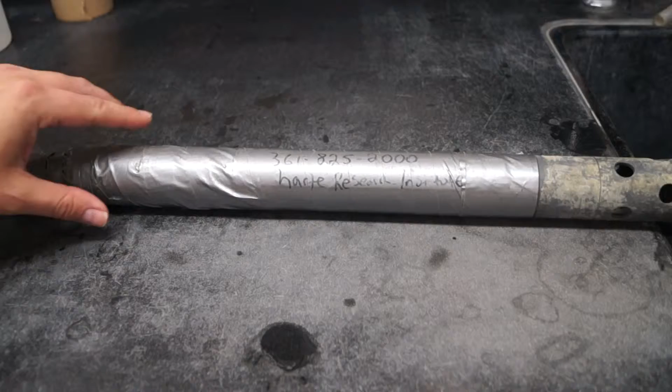In this training video, we will be post-calibrating a YSI Sonde instrument that was deployed in the field. In order to do this, I retrieved the deployment form that went to the field and also the calibration sheet that was left in the book.

So the first thing you're going to do when you get this unit from the field is clean the outside of it, but not the sensors itself. Do not clean the insides of the sensors because we're going to be doing the post-cal procedure. This unit was scrubbed, at least it's somewhat clean on the outside, but it has the duct tape on it. The first thing we need to do is take this duct tape off so that we can hook it up to the computer and also clean the outside very well to get it ready.

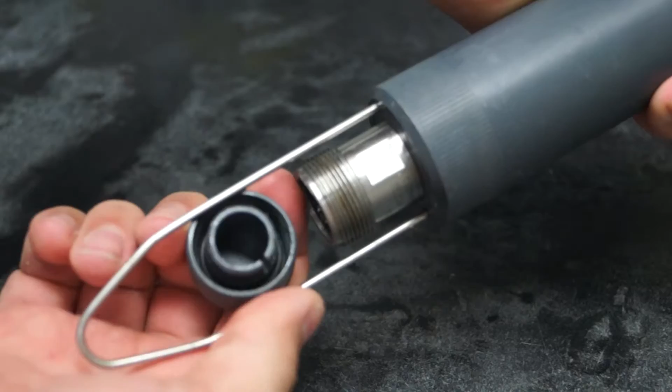I've got the outside of the unit clean now and the duct tape is off, and this connector looks pretty good. I did not clean the top head or inside the sensors so that we can post-cal. I'm going to remove the cap on the end and give it a visual inspection to make sure there was really no water leakage or anything in it. Looks decently okay. Alright, I'll put a towel in there slightly and try not to touch any of those.

Alright, now I'm going to hook it up to the computer. This only goes one way and it's in. Alright, so now let's go to the computer. We start the EcoWatch program. Inside EcoWatch, we're going to go to COM terminal, and then we are going to connect to COM 4. Now we should see the little hashtag that the sonde is operational. If it's not operational, that means that the batteries had run out and we would have to put new batteries in order to get the data off that is logged.

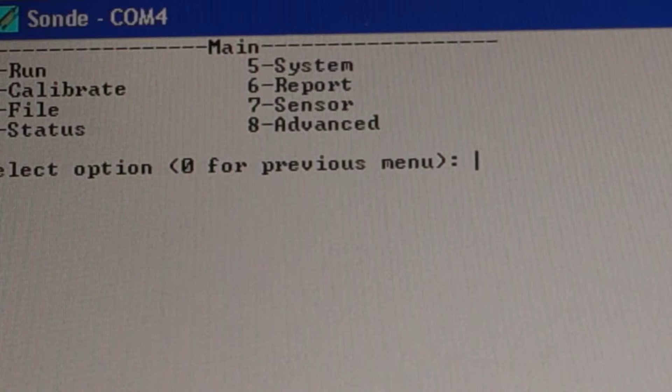So we type menu. Okay. What we're going to do now is stop the logging, because it's been logging this whole time in the field. What we want to do before we post-cal is stop logging and get the data off. So I'm going to go to run unattended sample and see it's been logging. So we're going to say B to stop logging. Stop logging, yes. Okay. And now we're going to go back, and according to the deployment sheet, the file is W2 15 12 20 on this particular unit.

So we're going to go File, and we want to upload this to the computer, and we're going to pick the file we want to upload. So W2 15 12 20, that looks like this bottom right here. So S, and then we're going to say proceed and pick PC 6000. Now it's actually uploading this whole file to the computer, which will take a few minutes to do.

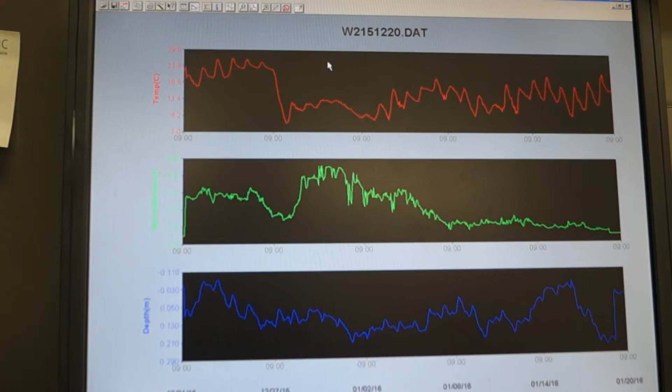So the file finished uploading, and I want to look at it. So I'm going to go to File, Open, and then pick the file. It's going to be in this directory structure right here. This is on this little computer that is downstairs in the lab. So we're going to pick the W2 15 12 20, this one, and I say OK. This is going to open up a bigger window. Let me scale back a little bit here so we can see the whole file. This is just on the computer. I can't take a screenshot of the computer, so that's a little bit of a problem.

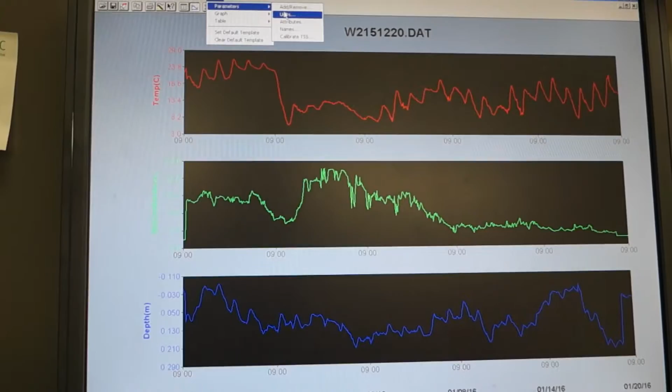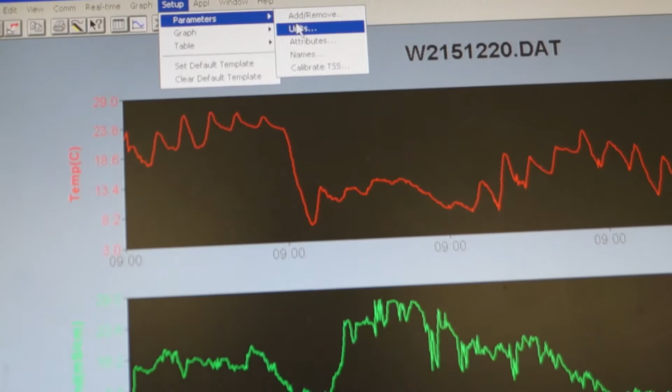Alright, so this has got temperature, specific conductivity, and depth. We're missing the salinity from here, so what I need to do is go add salinity. This unit didn't have any other parameters I needed to add. If we had, say, a unit that needed DO, you would have to add that as well if it's not on the file. So let me zoom into what I'm doing here. We go to Setup, Parameters, Add, Remove, and that lets us pick through a list of parameters that are on the sonde that we want to include in the file.

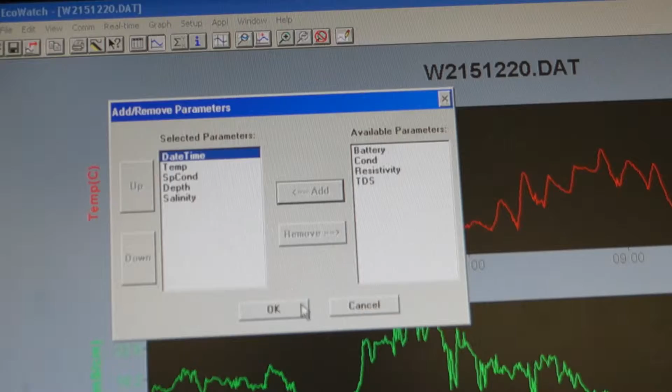So you could include the battery, conductivity, these things, but I'm not interested in that. All I really want added is salinity. So that way these are all going to be in the file, and when I say OK, this now adds it to this screen. So if I pull back, you see the whole screen right here.

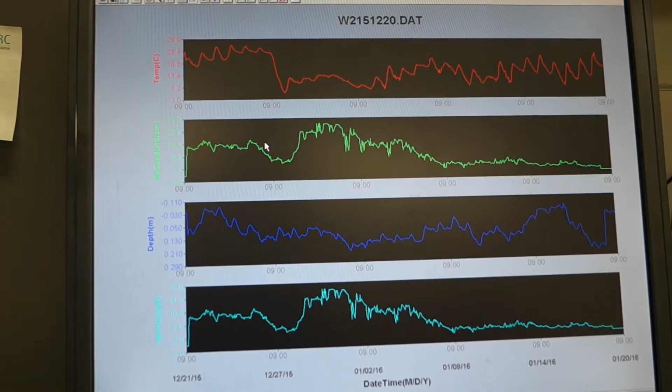Now what I'm going to do is save a screenshot of this on this computer, and the way that we can do that is on a keyboard of any PC computer, you push Shift and then Print Screen. So if I hold Shift and Print Screen, that's it. It took a screenshot. Now nothing actually happened on the screen of the computer.

Nothing actually changed, but what you can do is if you go to Start, Run, and MS Paint's already there because I did it before. I open Microsoft Paint, and then what you could do is paste, so Control V. Now I just pasted the screenshot. Now I want to save that.

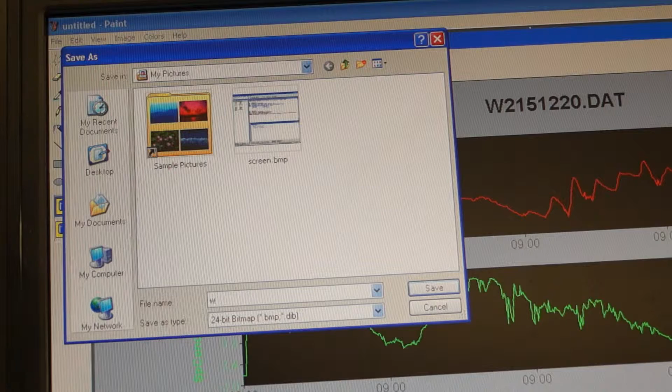File, Save As, and I'm going to save it with the same name convention that we're using. So it's W2 15 12 20, and just save it as a bitmap, but I'm going to put it where the other data is located, so it's in C EcoWin data, and I'm going to click Save. Alright, now we saved a screenshot of this data, so I can go ahead and close Microsoft Paint.

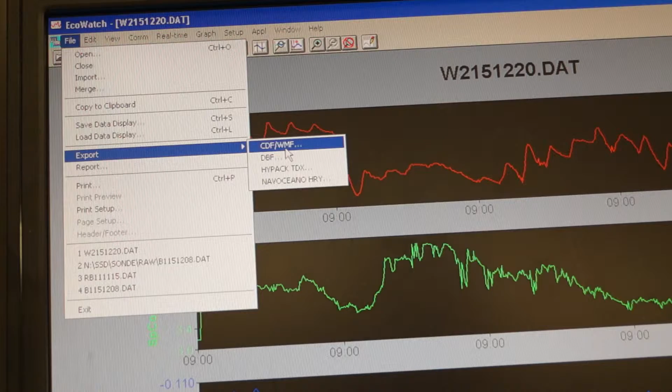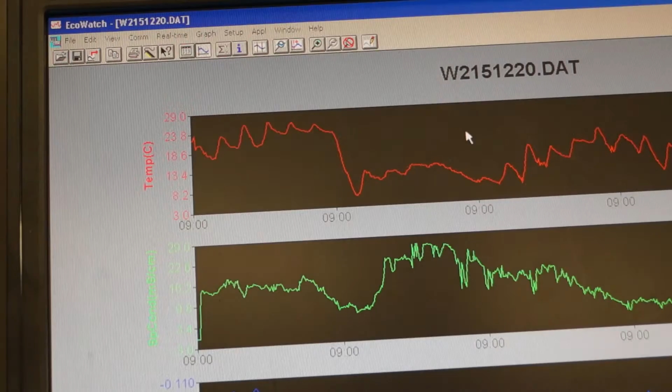Now I'm back in EcoWatch, and in EcoWatch I'm going to export this file. File, Export CDF. It's going to come up with a window to export to CDF in the same folder structure. All right, and then I'm just going to say export, and that's it. So now I can just close this file using the little X, and we've closed that. One last thing that we need to do is move the file off of this computer

onto our network share. So I'm going to go to My Computer, and I'm going to navigate to the EcoWin folder, C EcoWin data, and if you just sort by date modified, you should see these things right at the top. These are the files that we're interested in. So I'm going to get another file window, and this time I'm going to go to our share on N, and navigate to SSD Sonde, and inside that, raw. This is our copy of these files.

So if I move this out of the way, now I'm just going to take these files that we just created, and copy them onto the other folder. And that's it. So now they're there. So we made a copy. So in the next video, when we go to actually trim our data and look at things, we can do that at our office. While we're in the EcoWatch program and the Sonde is still hooked up, what we're going to do now is postcal the machine.

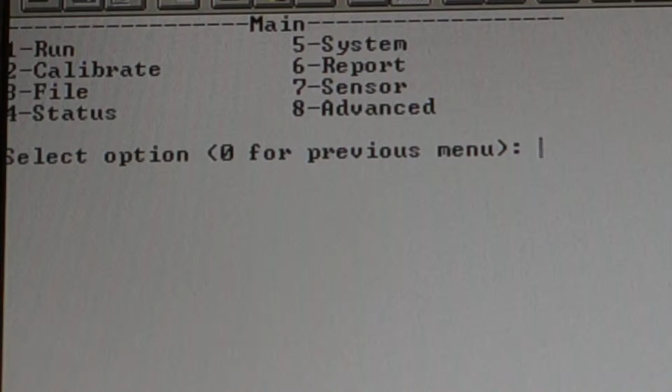Okay, so you've got to kind of warm it up because it was turned off. Go 0, exit menu, yes. Okay, and what we're going to do this time, instead of actually calibrating, because we don't want to change the sensors, is just see what the values are on the unit when we do a sample. So right now I'm just going to go to discrete sample and just start sampling, and it's just going to see what's on there right now.

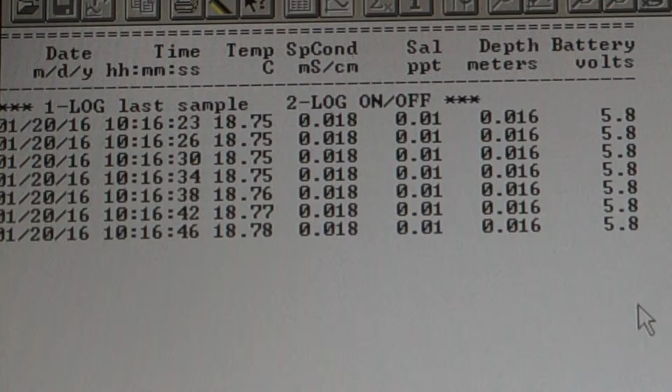Okay, so right now there are some things I need to write down on our calibration sheet, and one of them is the battery voltage of the unit. So right now there's 5.8 volts left in the unit, and I write down today's date. I'm also going to write down the depth, because we are not in any water, it's in the air, so depth should be 0. It's actually pretty close to what it should be, so it's actually pretty good.

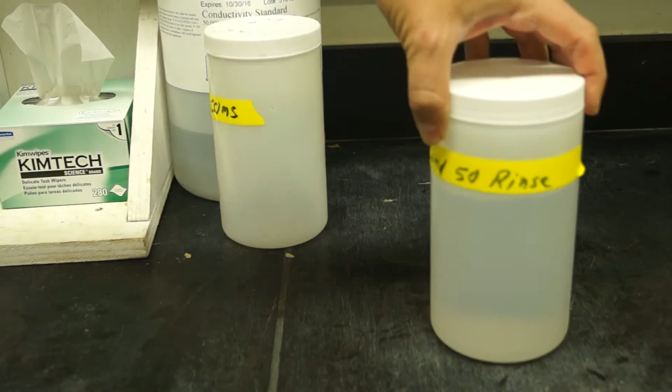So on the post calibration sheet, I'm going to have a spot for depth, and the value of the standard is 0. Initial reading is 0.016. I say it passes postcal, because it's within 10% of 0. Alright, so now I'm going to set up some conductivity standards. So just like before, we're going to have a rinse and then the regular standard. I need to fill this up.

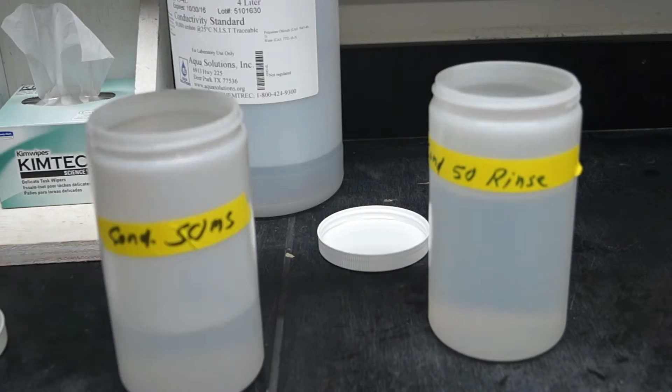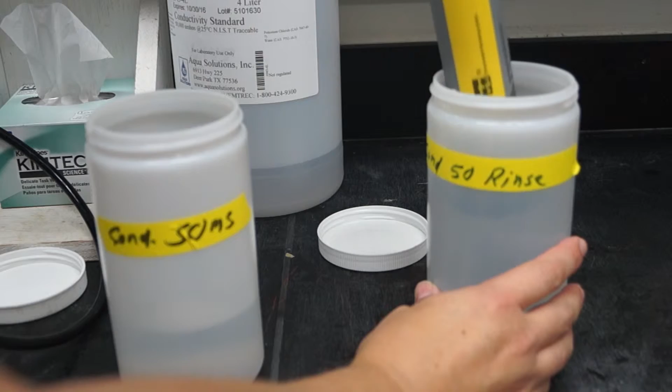Alright, there we go. And what I'm going to do is I'm going to rinse the sensor off. Again, this is where this is not cleaned. So what we're trying to do is figure out how far off was the sensor from the actual data. So I've rinsed it decently. Okay, and now let me put it in the standard. Alright, I make sure it's covered.

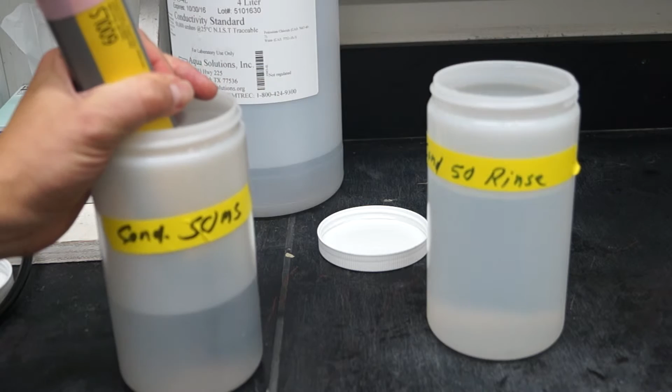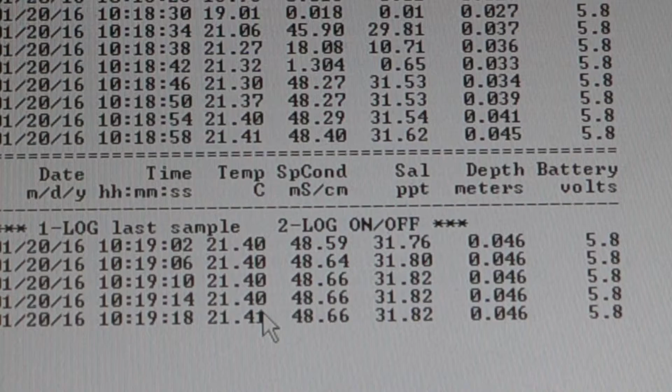So I'm going to go back to the computer and I'm going to see what it reads on the computer. So according to the computer, it is reading at 48.66. So our value of the standard is 50. The initial reading is 48.66 or 67. Looks like it's going up a little bit. And that should be able to pass post-cal because it's within 10% of the standard of 50.

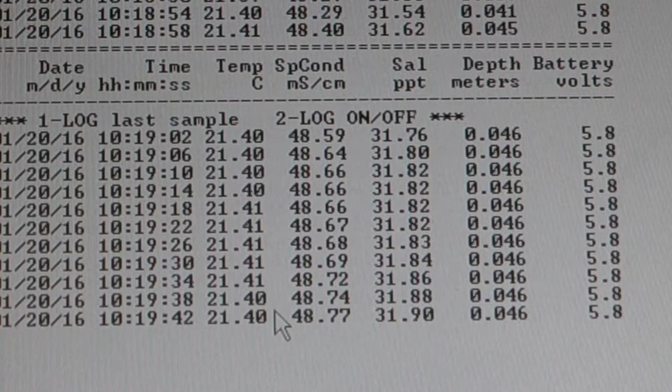I'm going to write down the temperature of the standard, 21.4, for my own records. Alright, so it looks like this unit passes post-cal, which is very good. So now I need to clean up. I'm going to stop logging on the computer. And I'm going to unhook. Okay, and then I can put this cap back on.

Alright, then I'm going to dump our rinse. This is especially important since we're post-caling and this is a little bit dirty. Pour the standard into the rinse. Screw this back on. Alright. Now I can further clean this instrument and get it ready to put back up on the shelf.

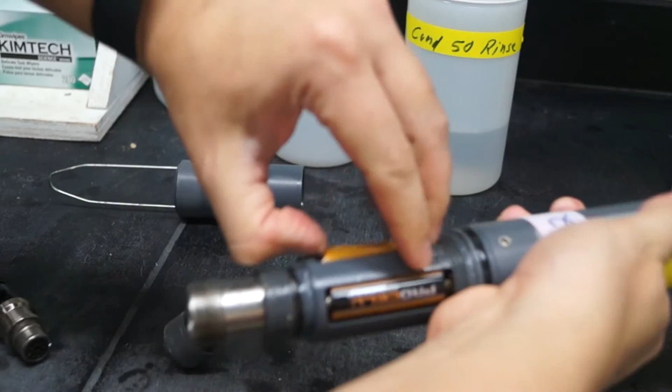I'm going to remove the battery cover, which might take a little bit of work. Actually, I needed this off to do it. Got it. Takes a little bit of force. Okay, we're going to take these batteries out and then put them in the recycle bucket, which is up here.

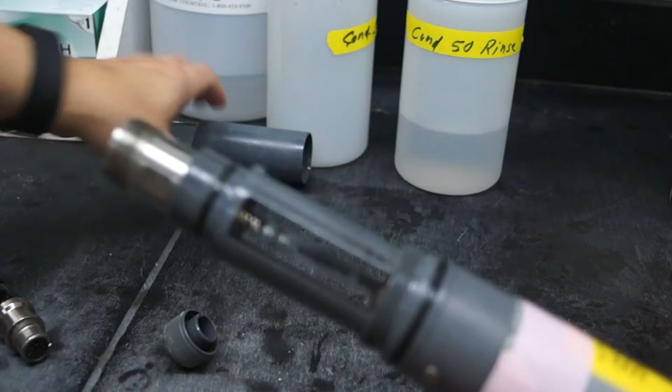And also while I'm in here, I'm going to give it a kind of visual once over. It looks like I've still got plenty of gel that was on here, so I don't see any water damage in the inside, which is good. So I don't need to do any other kind of repairs to the unit. Alright, and now I'm going to take it to the sink and I'm going to fully wash out the sensors and scrub the inside.

Now that the unit is fully clean, I'm going to dry it. Make sure no water got in there. Alright. Let's set the filled cap back on that I cleaned. I'm going to take the battery cover and just loosely hold it on here, put the cap back on it, and then I'm going to store this where the other sondes go.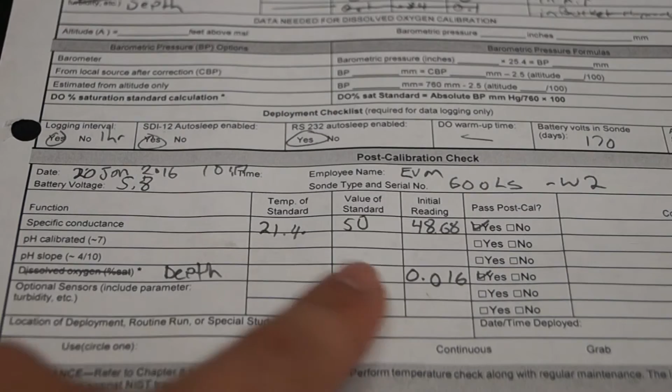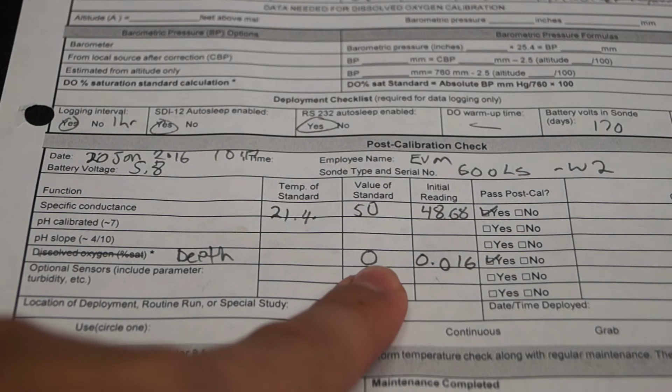So to recap our documentation, this is the original sheet that we used to calibrate this unit with that I took out of the book. And so in the post-calibration check system, I have the battery voltage, today's date, time, who did this, the unit's name. I put down for specific conductance the temperature, the value of the standard, and what the reading was, which it passed. I also did depth, which the initial reading is 0.016, and again it passed. Alright, so I need to fill out a couple more things.

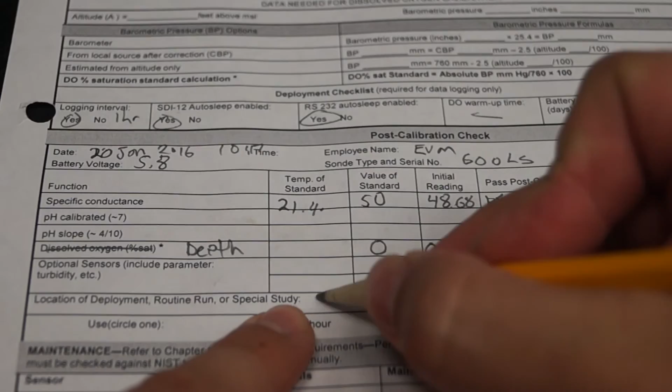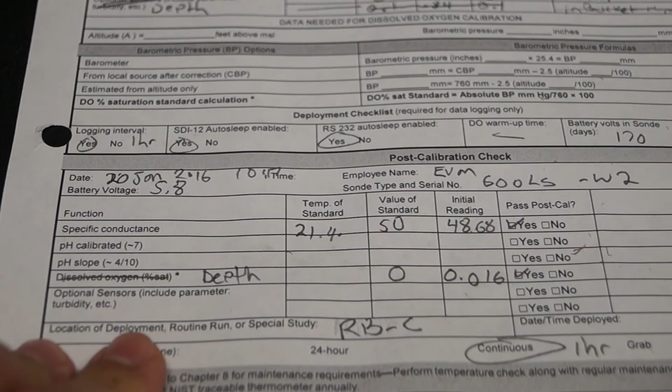Some of these sheets are a little bit different, but at least we said it went to NIFWIF. Okay, and we did a continuous, let's see, 1 hour. Actually, this isn't NIFWIF, this is Rincon Bayou. Okay. Alright, and the date and time retrieved was on this sheet. So the date and time retrieved is this right here. So I'm going to write down 19th of January 2016 at 12:10. Okay. Now this sheet is done. It can now go back up in the book and be finished.

What I'm going to do is take the deployment sheet and take that upstairs to do the rest of the work on the data. But what I'm going to be doing is say yes, it passed post calibration, and today's date and sign. Alright, now I'm going to take this sheet with me and do the other computer work in order to get this data set in SAS and trimmed.